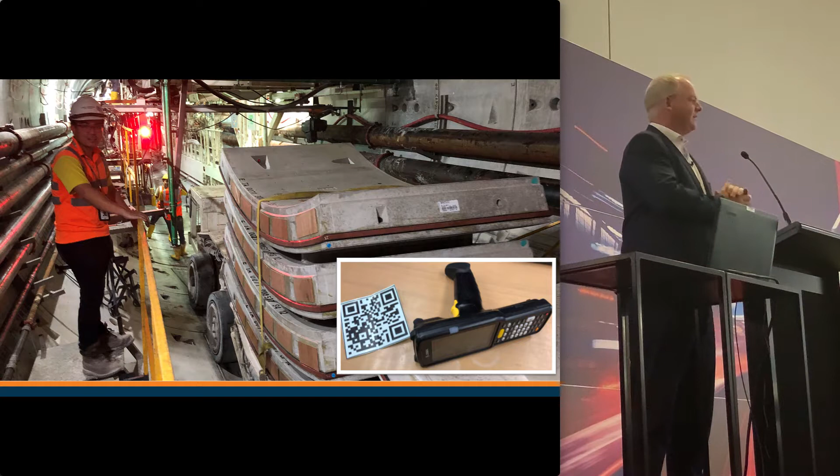I'm going to tell you a quick story about some of the people that are working for Gamuda. This is John Lim, and if you're here this morning for Dr. Oi's presentation, you may have seen John's picture. John is the engineer that wrote the software for our automated TBMs.

I met John about a year ago, and my reason for meeting John was I was asked to go and look at a project where they were using QR codes to track the delivery of the tunnel segment linings into the tunnels. My background is in information management, 3D modeling, project management. So I was helping John out to try and figure this out. And he told me about this automated tunneling machine.

And it was like a secret. Nobody knew about it. So I said, mate, you got to get out and tell people what we're doing. So they put together a case study and put it to the International Tunneling Association. And last week, John and his colleagues won an international award for creating the first self-driving tunneling machine. So a very cool piece of technology and very, very productive.

So my presentation this morning is about technology, but it's actually about the people behind the technology, or more importantly, the people in front of the technology. We believe that we have to empower the staff to innovate, and we believe that celebrating their success on these kind of events is a very good way of motivating people to come up with bright ideas and share them in the organization. So I'm going to use a case study from Kuala Lumpur in Malaysia this morning.

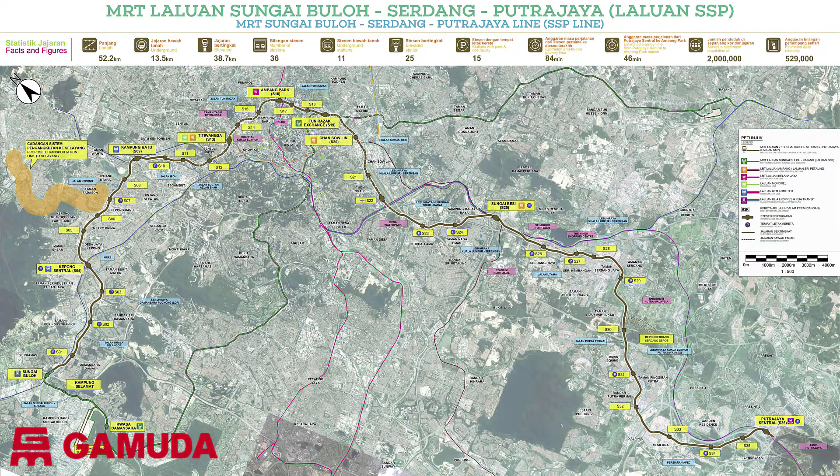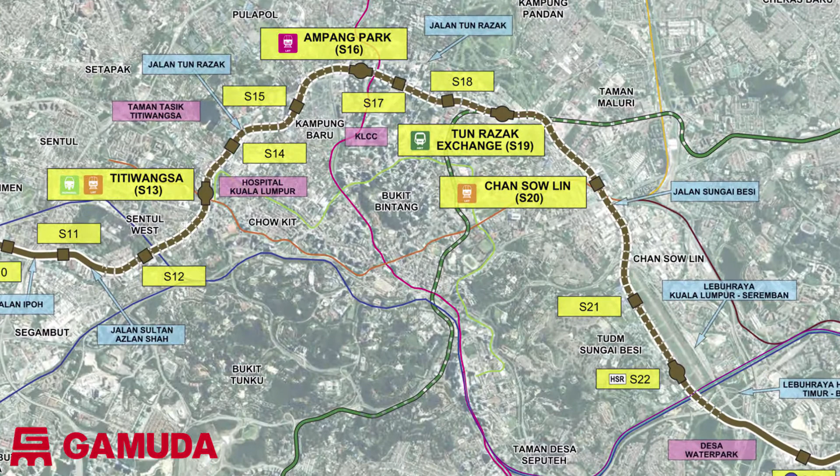This is the MRT project. There are two projects. There's Line 1, which we've already completed and is operational. This is one of the Line 1 trains. And I'm going to talk about Line 2. Line 2 is a 52-kilometer alignment with 13 kilometers underground through the inner city of Kuala Lumpur. There are 17 construction sites on the alignment, involving 11 stations and 6 ancillary structures. These are all major civil engineering projects in and of themselves. And when you combine them into a 13-kilometer design and build contract, it's one of the biggest civil engineering projects in Asia.

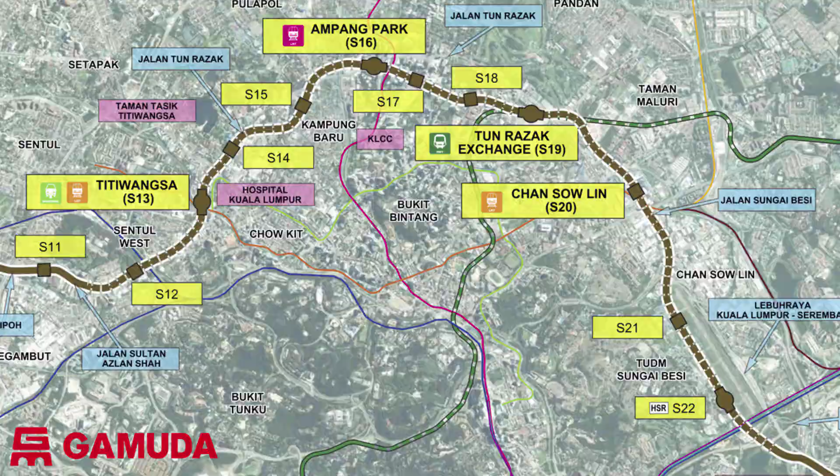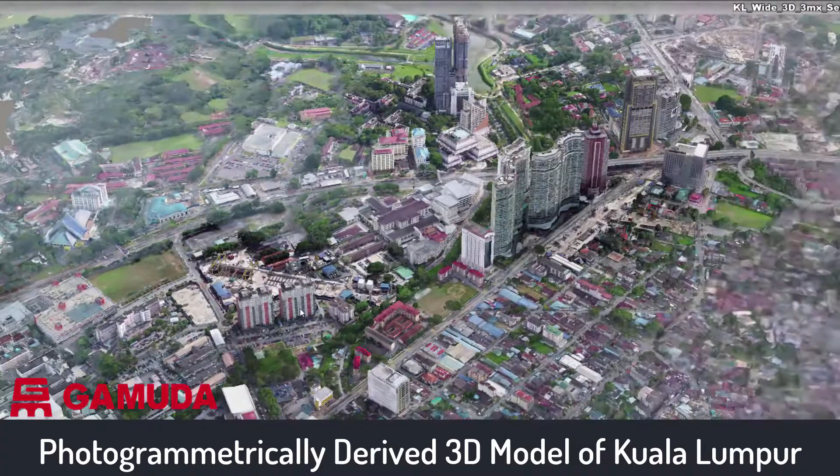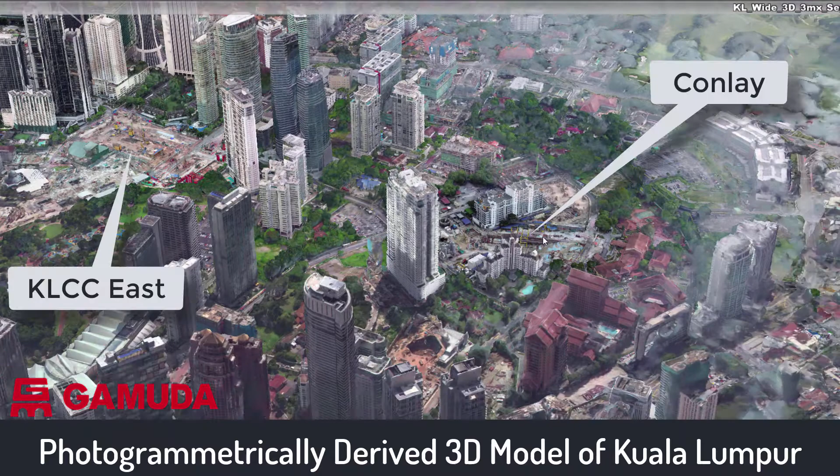We have been extensively using photogrammetry, which is using drones and helicopters to create 3D models of the sites. So this is an actual 3D model of the inner city of Kuala Lumpur, showing the locations of the stations. And you can see, this is the famous Petronas Towers. You can see the sites are in a very dense urban environment. So one of the problems with this project is logistics. I'll come back and talk about some of these particular stations in a minute, but this gives you a very good sense of the scale and complexity of the project.

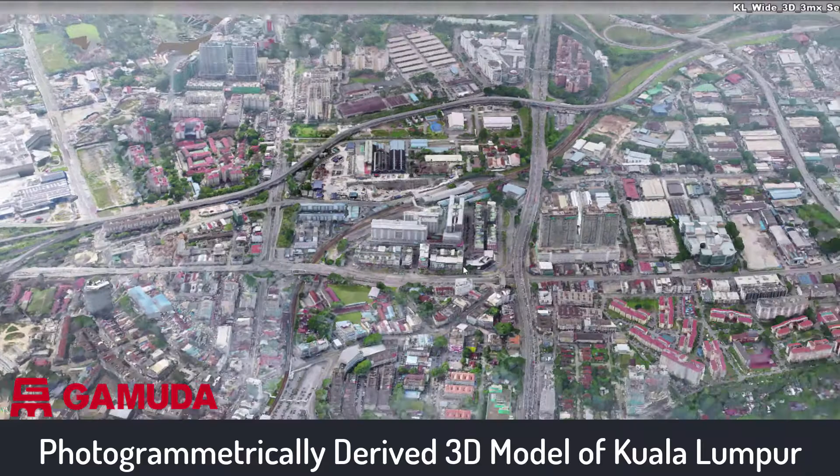Now, this being a construction conference, I'm going to be speaking about the use of technology on the sites and how we've gone from the BIM design side to the actual construction delivery side. To give you a sense of our progress, we started this project in 2015. I've been personally involved since then. And we're currently through construction works at about 62%. And, excuse the pun, we're on track to be up and running and operational by 2022, sometime between Q1 and Q2 2022. So we've still got another 2 years of solid work ahead of us.

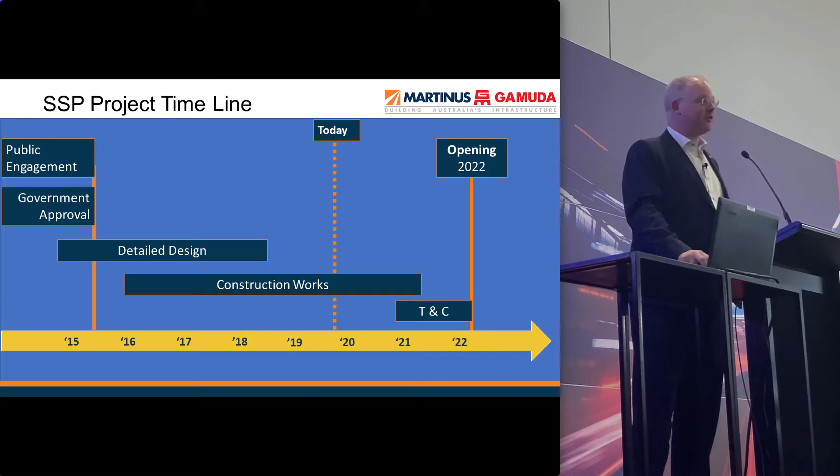Now, one of the strengths of this particular project is the client's involvement. At the very outset, the client set out to achieve BIM level 2, and they were using the UK Crossrail as a template and as an example of leadership. So we set out to basically replicate what was achieved on Crossrail, and we tried to do that without the downsides of Crossrail with the delays and everything else. So we're trying to do a better job than Crossrail, which is no mean feat. So the objective of the client was to achieve BIM level 2.

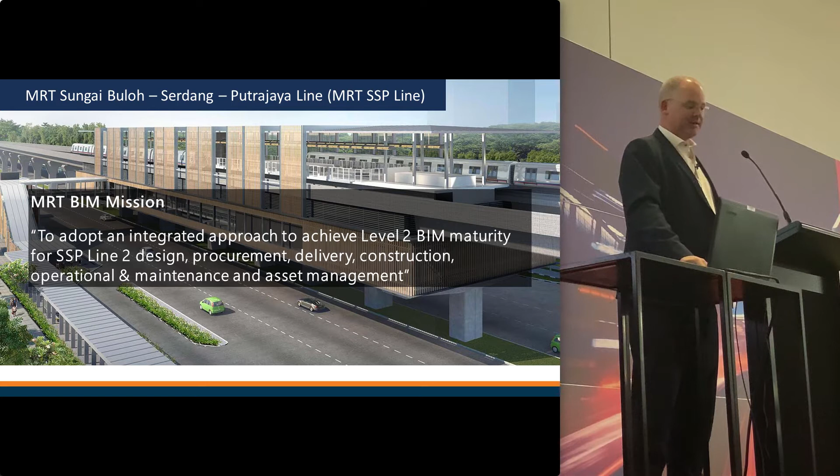So we appointed AECOM as the lead consultant, and they appointed the design team, and they were all contractually obliged to work in BIM. So this is one station that was designed in Revit. This station is called Titiwangsa, and it's an interchange station between an underground rail, monorail, and an elevated LRT. This is the architectural model. This was designed and created by the architects. You will note that it's only the architectural elements.

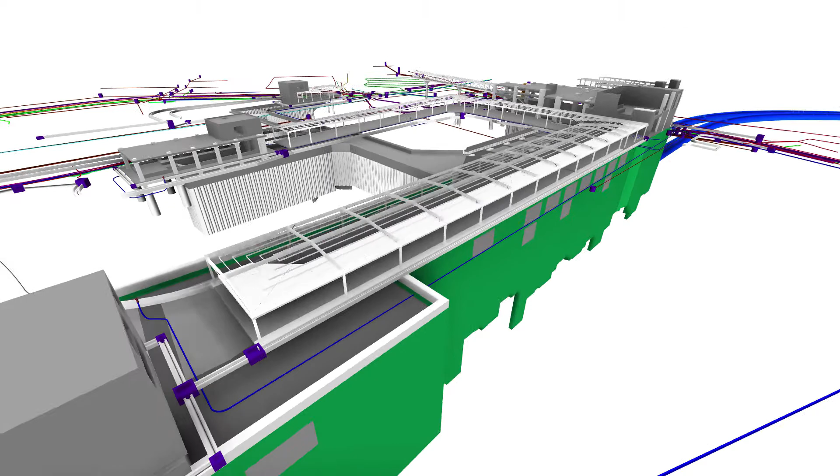All of the structural elements were modeled and designed in detail by the structural engineers, separately from the architects. So there's steel, there's diaphragm walls, there's secant bored piles, and an entire concrete structure inside. And these stations, being underground stations, are heavily serviced, and you can see the complexity of the building services and MEP services in this.

This is the MEP system, so this is the actual air conditioning, electrical, and fire. We've also got all the rail systems. So we have the track systems, we have the comm systems, we have the security systems, and these are all modeled by the system-wide contractors.

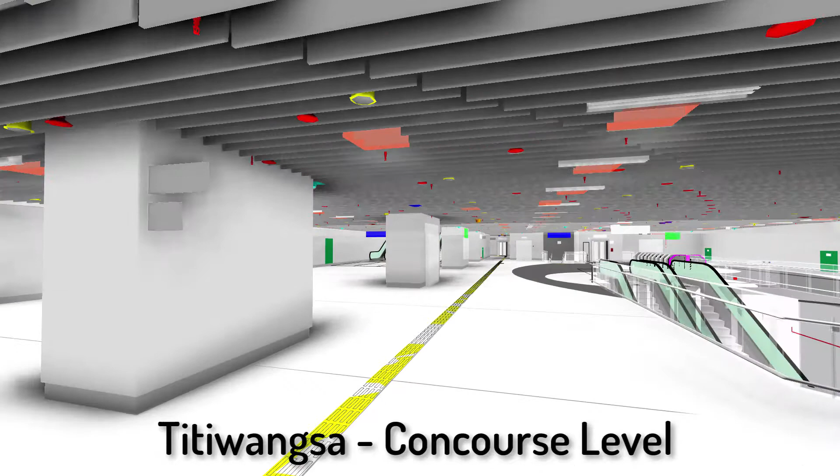So one of the challenges with this process is, how do you put all these models together? How do you find coordination issues? How do you solve design problems? So we have an entire federated model approach, and this is just what it looks like at the detailed design stage. So this is pre-construction. This is the level of detail the designers achieved in the lead up to the project.

With these tools, we can cut sections, we can look at plant rooms, we can look at specific details, and the models give us a very, very clear insight into what we have to build as a contractor. So in terms of the use case, the project is divided into 4 or 5 key phases. We're currently doing the final CSDs, which is the site-based coordination. And you can see our uses of the model.

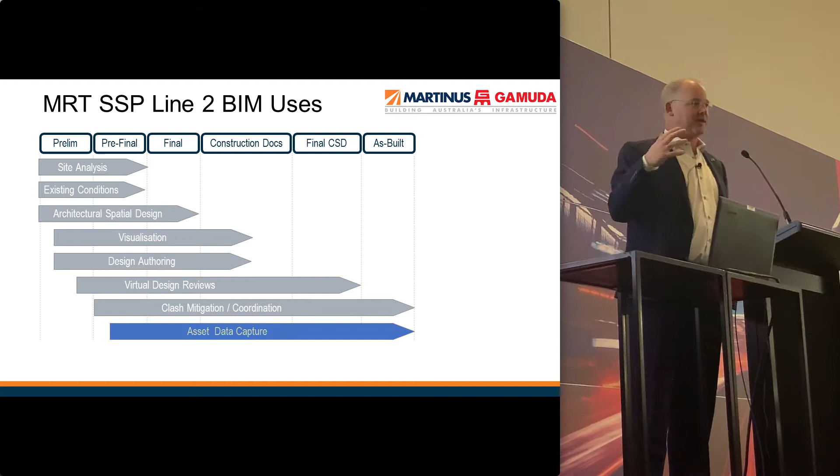So we used it at the beginning for doing design, architectural design, spatial design. We then used it for all the design authoring. So all of the construction drawings have been produced from the models. This is not a 2D back to 3D process. It's a 3D driven process. We say model first, draw second.

And then we've done all of the design reviews, all the coordination reviews, all the interface management, all the interface reviews using these models. And when I say interface reviews, I'll get to the complexity in a second. But the objective of the MRT underwriting all of this was to capture all the asset required to maintain and manage the actual infrastructure when it's built. So I'll tell you how we've done that as we go forward.

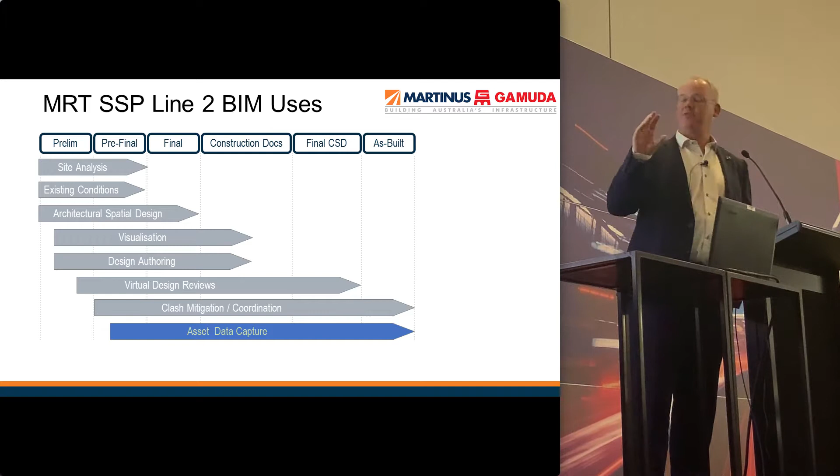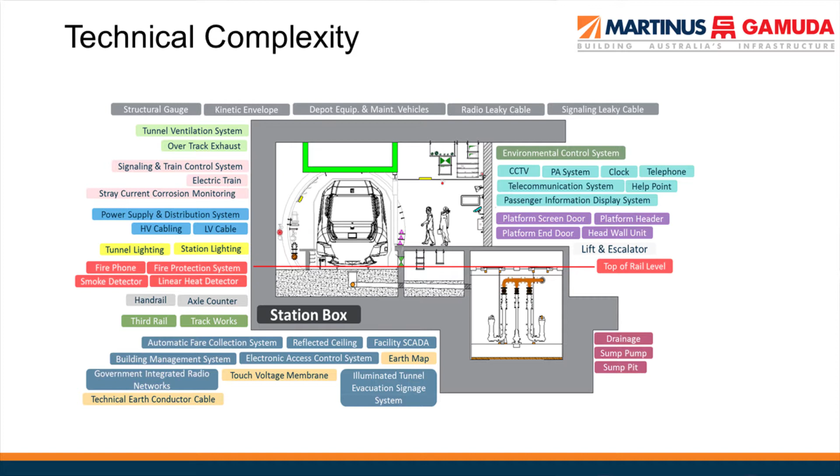Somebody's moving a lift. So this is an overview of all of the interfaces that we have to manage. And as a design and build contractor, it's on our shoulders to coordinate all of these interfaces. So you can see in an underground environment, the sheer number of interfaces and the complexity of interfaces is mind-boggling. So we use the models and the model breakdown to identify all the different interfaces and identify all the coordination issues that had to be done.

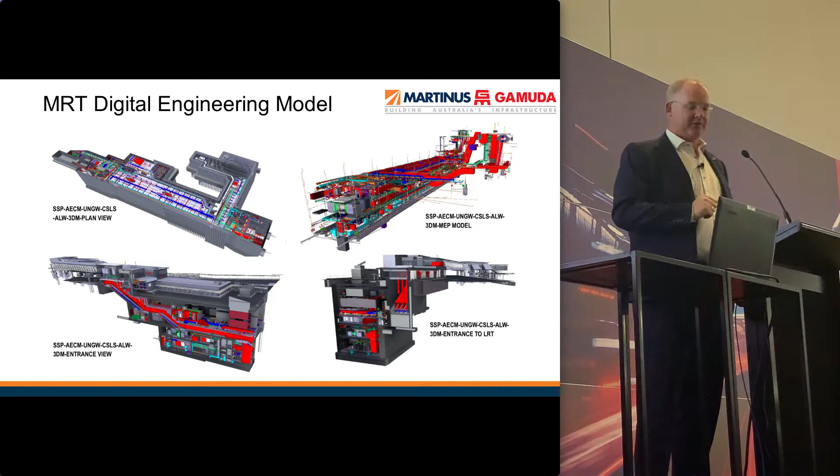So this is an example. This is one of the stations. This is Chan Sow Lin. So you can see we have all the models created and all the coordination done. We've also done it for all the intermediary structures. So we got escape shafts, we got vent shafts, etc. So this is what the consultants produced, and our challenge as the contractor was how do we use this to actually build the infrastructure?

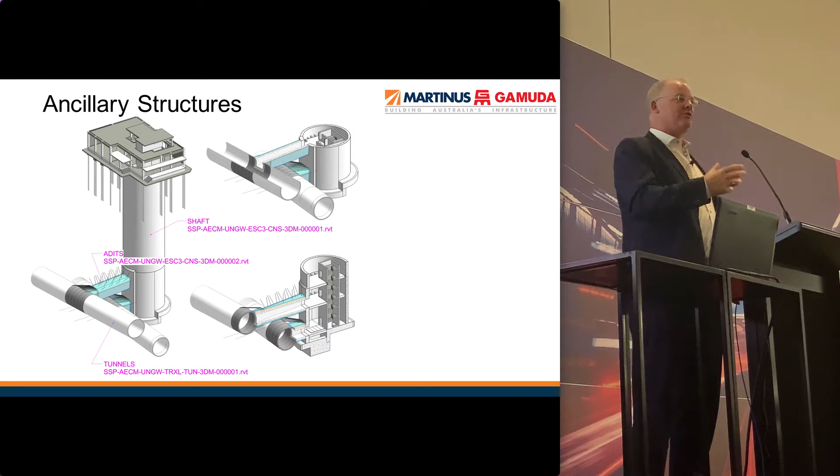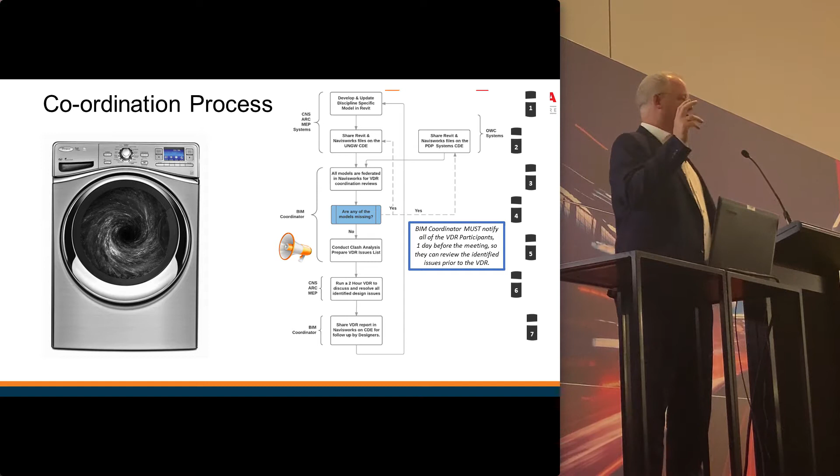How many people here have been involved in a BIM project of sorts? Who's here seen a Revit model or a BIM process? We've got a few people, right? You all know, having looked at those models, how much effort goes into finding issues and solving issues.

And we had a process on the project where we would start through this workflow, creating models, identifying issues, running workshops, tracking all the issues, issuing reports, and then recycling this on a 2-weekly basis. It's like a washing machine. The design consultants go through this every 2 weeks. Sometimes they fix the issue, sometimes they create more issues, but this goes round and round. And it's very difficult to manage and track.

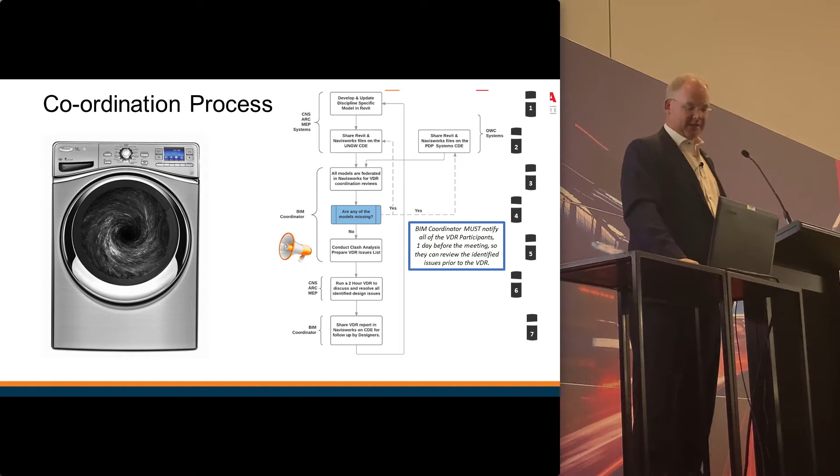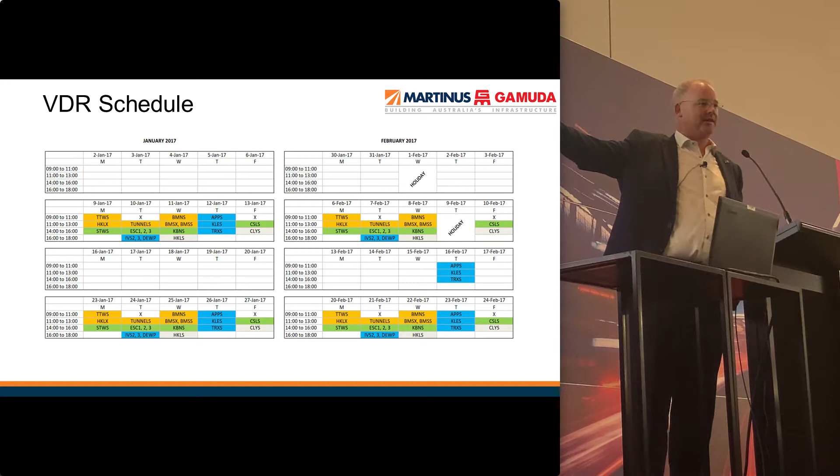So Rahimi and his team set about creating a system where they first of all scheduled all these workshops in a rigorous pattern, so they were all calendared out. So every 2 weeks, everybody knew where they had to be. And each one of those boxes is a station site. So every 2 weeks, if you were on a specific station, you knew where you had to be.

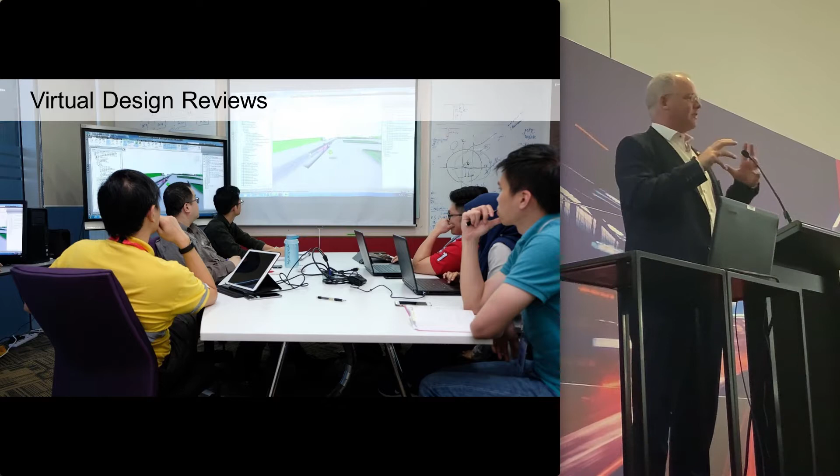The workshops were done in small teams. So we didn't have 50 people in a meeting room. We had the small team of decision makers. These are the engineers. The gentleman on the left with the yellow is the client. This is the coordination engineer here, and these are the design engineers working on the models. So we had very specific groups of people looking at very specific issues. And at the beginning, we would find things like cable trays running through escalator pits.

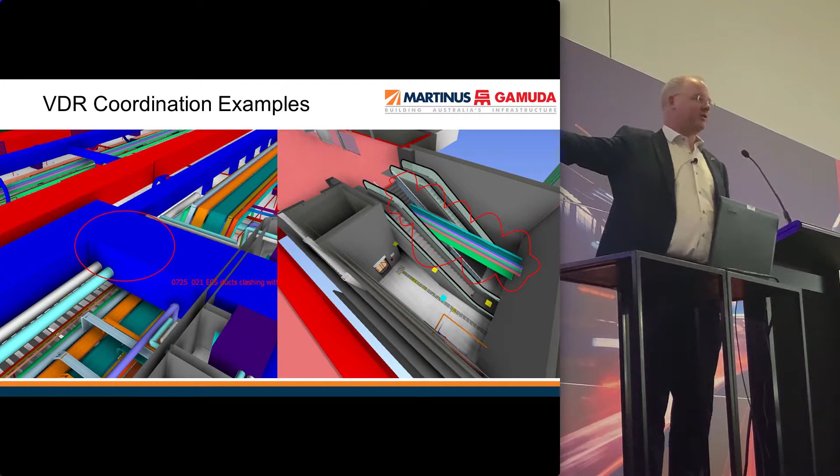Now, good luck trying to get out of that station if there was a fire with all those cable trays over your heads, right? So that had to get fixed. We got right down to solving pipes clashing with ductwork to make sure that we had no MEP coordination issues.

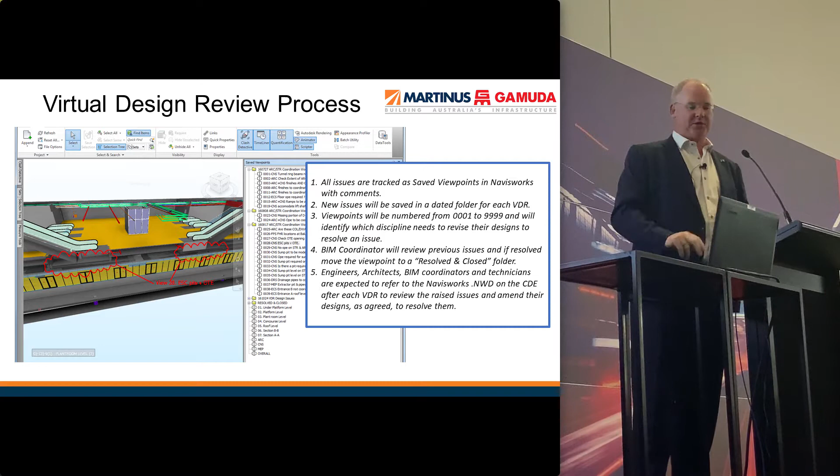So all of these issues were tracked. They were numbered. They were assigned to someone to solve. They were given a date by which they had to be solved. It was all project managed. And this was all done by Rahimi and his team using a platform called BIM Collab. So this is an online system where we can see station by station, consultant by consultant what's happening,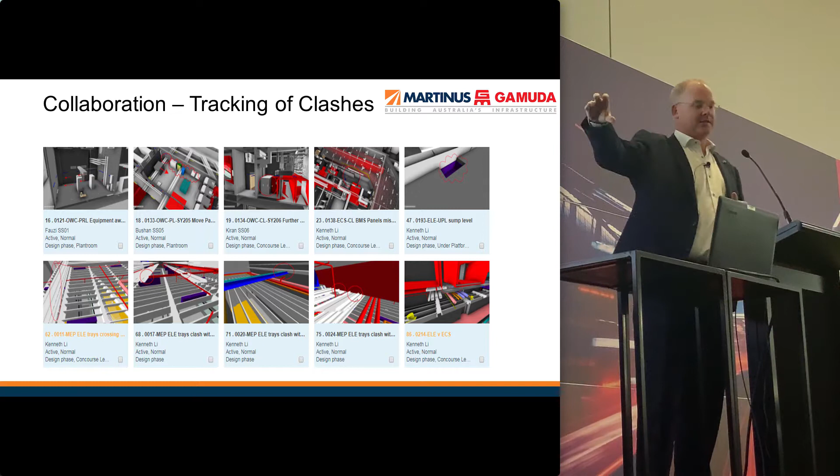and we can monitor their performance. So we would get a dashboard, we could see all the issues, we could see who was assigned to those issues. And the most interesting part of this, because we had 10 stations, we could track different stations against each other. So Rahimi created this tracking chart, and these are the number of issues per station, and you can see how they're comparing. So we could see which stations were doing better than other stations.

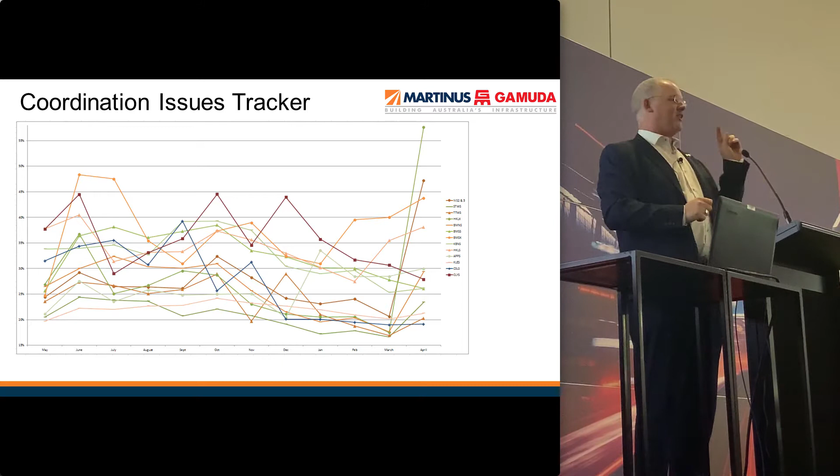Very useful when you've got competitive teams, when you want Team A to do better than Team B, and going, mate, you're doing worse than they are, you've got to up your game. So this all came from Rahimi.

Now, one of the things that we had to do very carefully was manage exchange of information, exchange of models, exchange of drawings. And to do that, we relied heavily on ProjectWise. So we had staff working in Kuala Lumpur, Singapore, Taiwan, Hong Kong, Philippines, and we had 2 offices in India. So we had an office in Delhi and we had an office in Calcutta. All of those offices needed real-time access to the models on a daily basis. So we used this platform to exchange all the information.

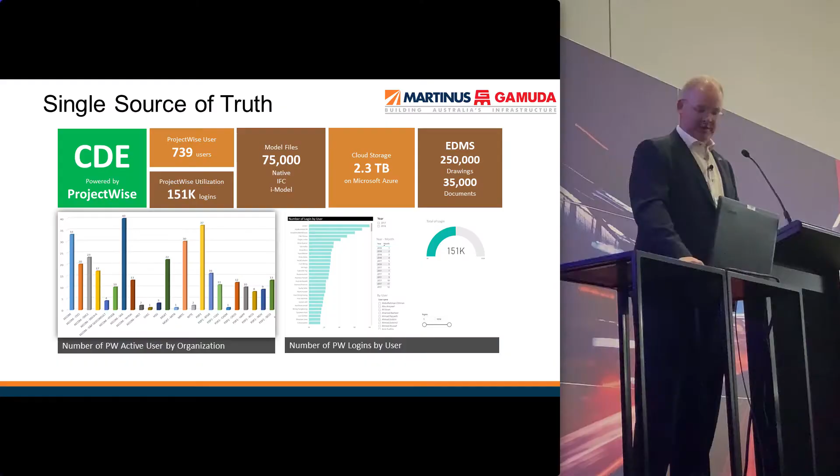Now, I've told you it's a very large project, but to give you a sense of the scale in terms of data, get this. This is the actual data dashboard from the system. This is probably from a year ago. There's over 2.3 terabytes of information on the platform. There's something like 75,000 model files, right? So when you get to that scale, the structure of the information, the organization of the information is absolutely crucial.

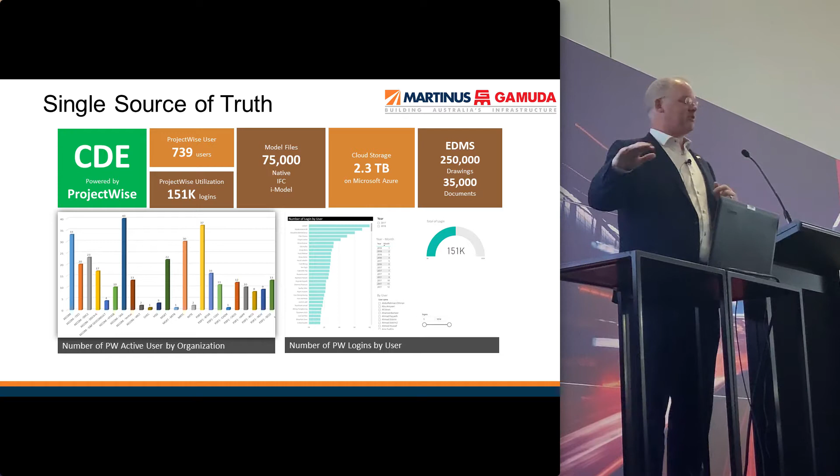And we've created a very sophisticated way of managing it by location, by discipline, by system, by models, by drawings. So it's very, very rigorous. It's very important that you don't let everybody come up with their own system. So on the scale of this job, we as the construction lead managed all of the information management systems. And we basically said what you could do. So we use the platform to share the models, the visualizations, the drawings, the specifications, the takeoffs, all the information that we needed to coordinate and deliver the project is on this platform.

So MMC Gamuda are the first Level 2 BIM capable contractor in Asia based on our work on this particular project. So through our experience, through our knowledge, through our systems, we've been recognized by the BRE as one of the best contractors in the region for doing this. This all goes back to how Nick and the team managed the staff to innovate. Rahimi came up with these systems. Rahimi's teams came up with the ideas.

Our next challenge, having gathered all the information, is to capture the information that the owner needs for the operations of the facility. And it is actually a very complicated task. It's made complicated by the fact that the MRT have never done this before. They don't actually have a full understanding of what data they need. So we had to spend quite a long time planning out what information we had to gather and then delivering that information to them in a structured format.

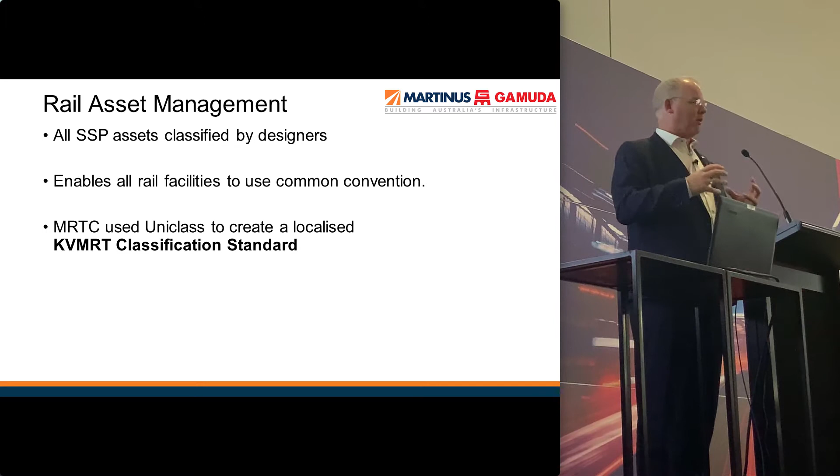So to do that, we've basically adopted Uniclass as a classification standard, and we've basically trained all the consultants to produce models that are properly classified. And it's not straightforward. So you have to classify things in 4 different ways. There has to be a classification by where it is. There has to be a classification of what room it's in. There has to be a classification for what system it's part of. And then there's a classification of the actual product.

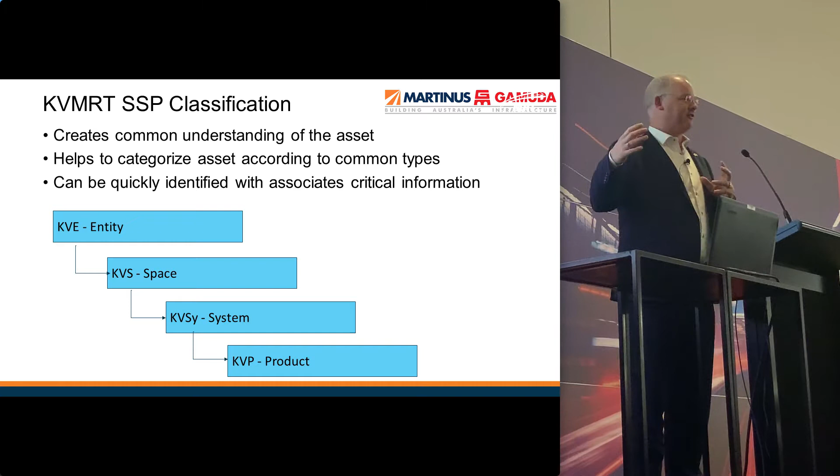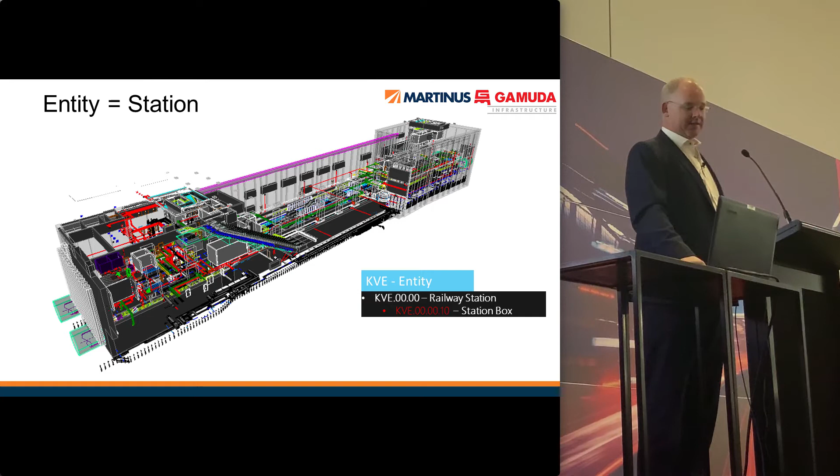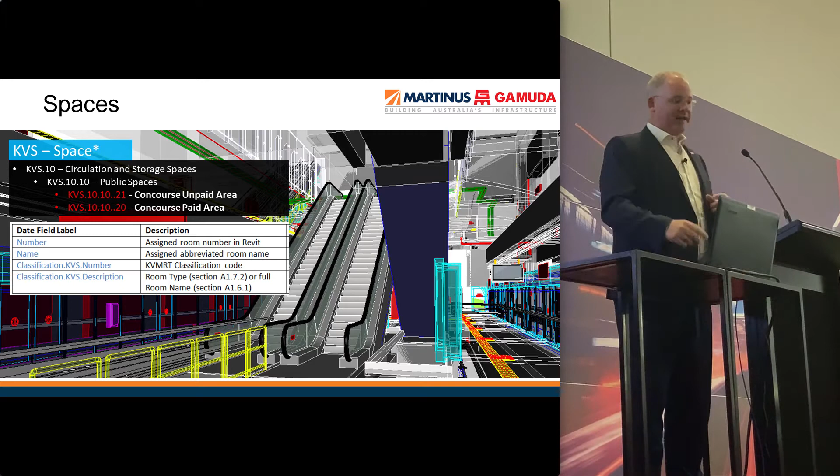If an object's sitting in a different space, we go looking for it in the other space. We then need to know what system it's in. So we need to know whether it's a fire sprinkler system, whether it's a mechanical system, whether it's an electrical system. So everything has to be properly categorized in that system. And then once we get down to the individual components of the project, we then have products. So whether it's an air handling unit, whether it's a cooling tower, whatever it is, there's a code for that as well.

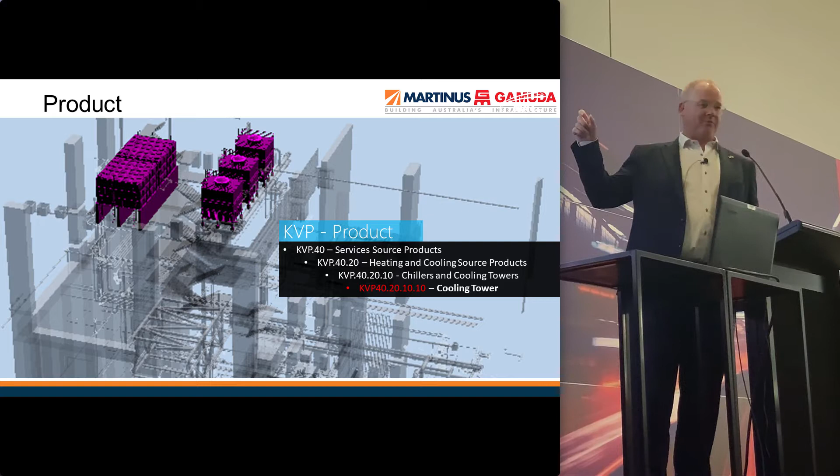The challenge with this is that the design consultants have never had to do this before in Southeast Asia. Getting designers to put in this data and put it in correctly is a pain in the... So this is very, very complicated. So what we've done is we've taken a lead from our friends in the UK. If you talk to the guys on Crossrail, they will give you one key nugget. Put the data on a diet.

Capture the least amount of information possible, and then you can audit it, then you can track it, then you can check it. So what we've done is we've identified the list of things that we're only capturing information for. So everything on that list, we're capturing information for. If it's not on that list, it's not being done. So we're not capturing information around ductwork, cable trays, piping. We're only capturing information about the actual things that we have to replace and manage.

So we've managed to convince the owner that that's enough. No more, no less. And then for each one of those devices or LRUs, this is the information we're going to capture. So we're giving them the classification, the tags, and everything else. So we've come up with a data structure that we know we can capture, that we know we can deliver, and that we know we can audit. So that's the asset management side. And now I want to talk about the site side.

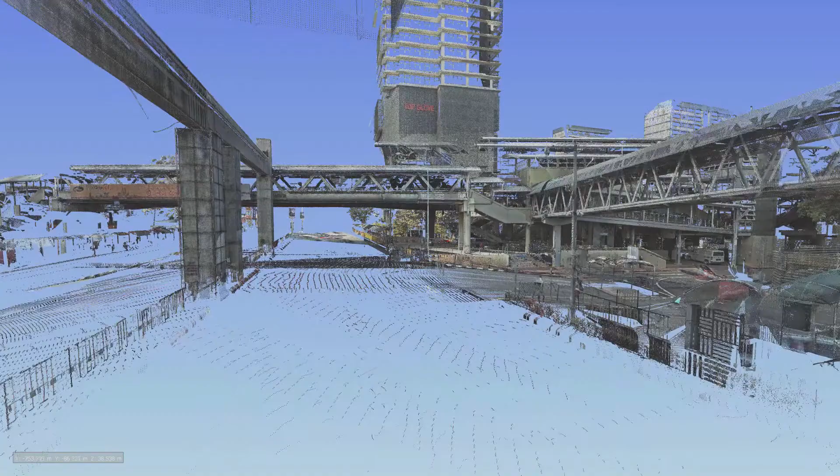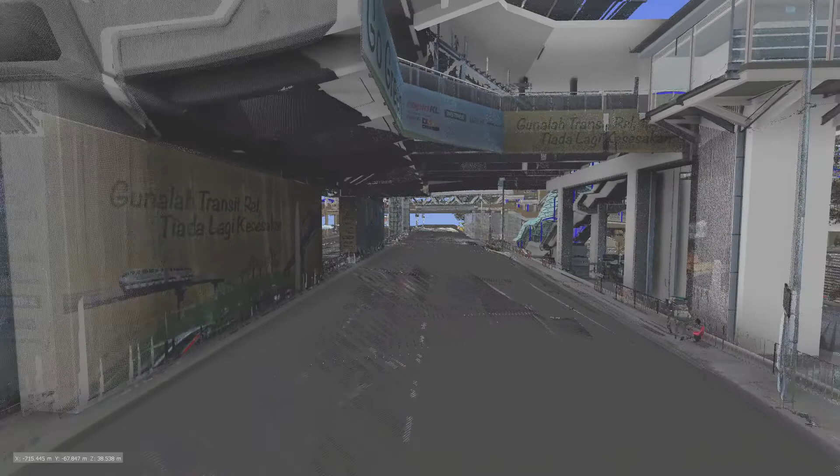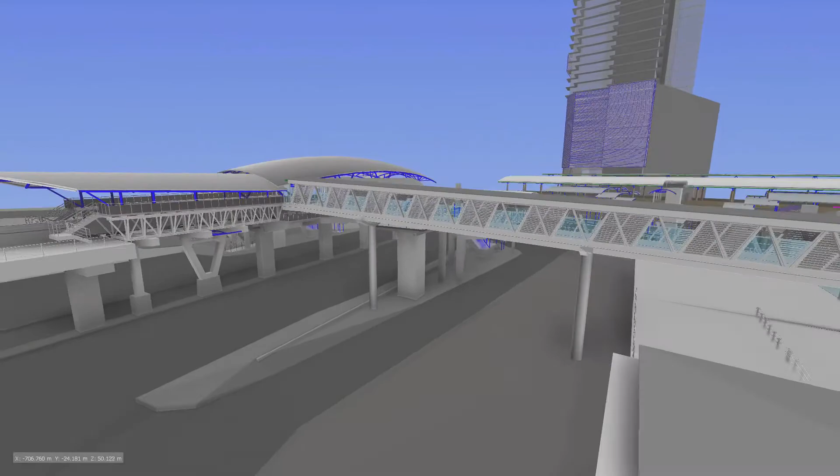And then we use those point clouds to create as-built Revit models, in this case a structural model of the monorail, that we gave to the design consultants and said, this is the as-built model at this station location, now crack on and do the design. Because we know that the as-built records are not good enough. We know the consultants will just take photographs and not look at the detail. So our survey team have created these three-dimensional point clouds and the as-built models of the site.

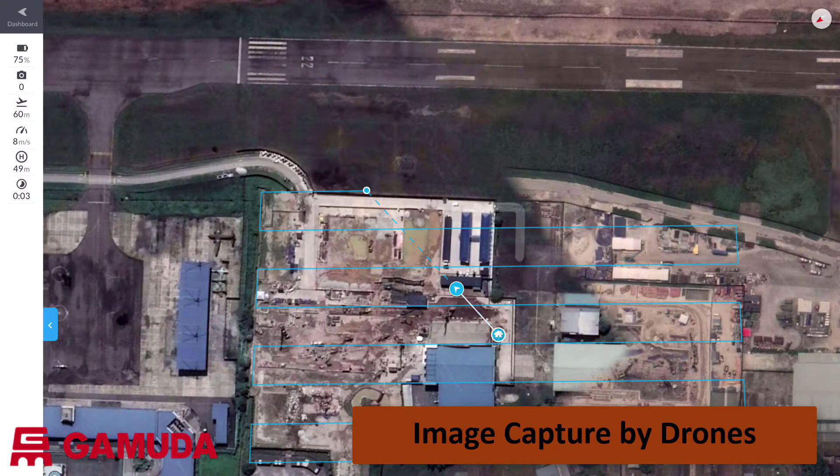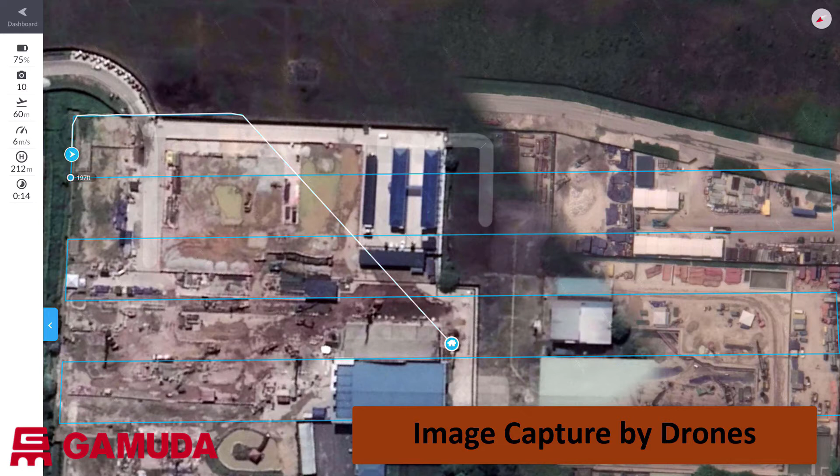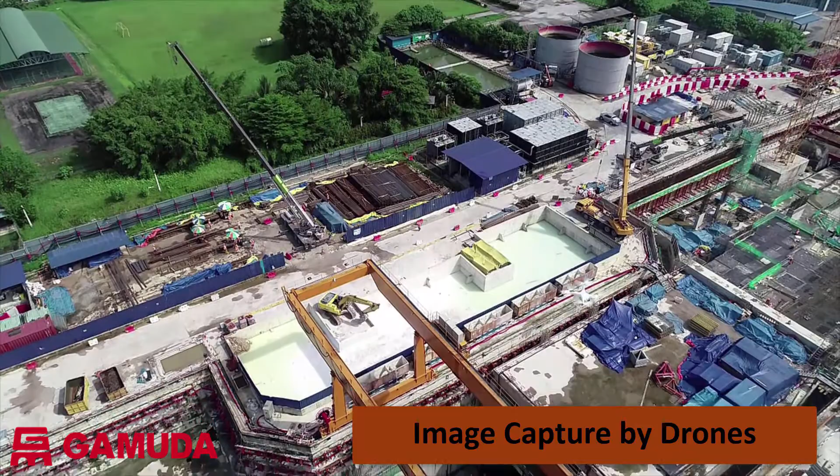And then about 18 months ago, Nick Moorcock, who I just showed you the photograph from, Nick is actually a qualified UAS pilot. He's actually qualified in the UK to fly drones. And we set about doing some research about how could we use drones for surveying of the sites. So this is a drone plan for surveying a particular site. This is a drone videoing another drone doing a survey. So we have two drones doing the work, right? And we've done this for this PR campaign.

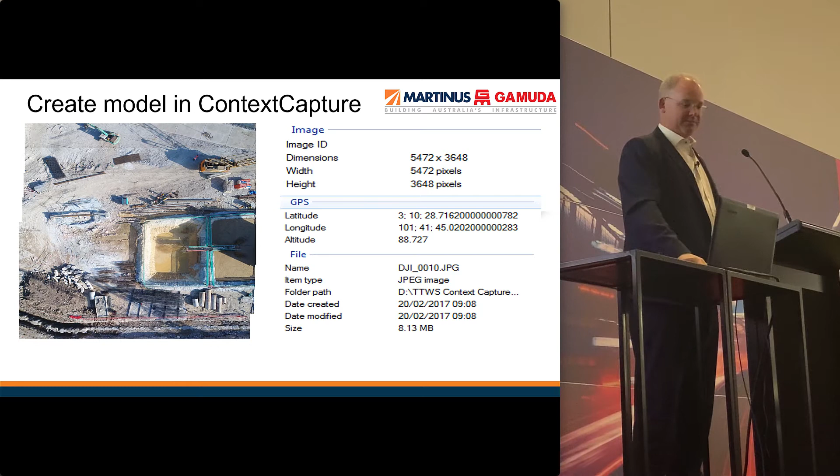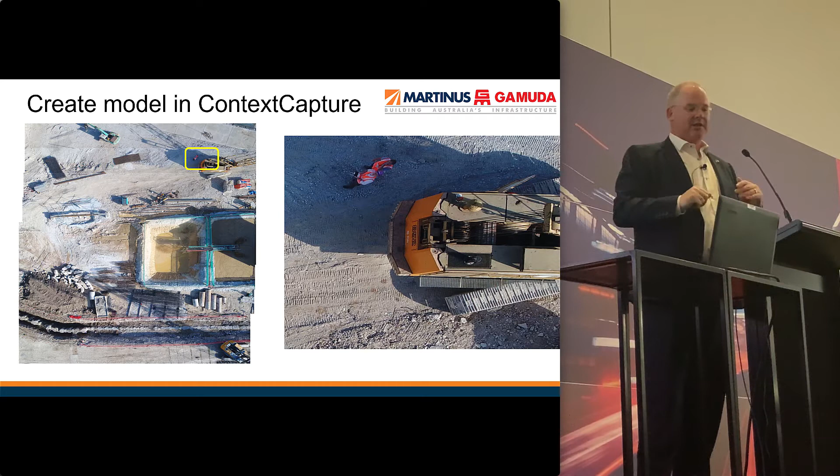So essentially the drones are going along and they're taking photographs. So they take a photograph basically pointing straight down. Each photograph overlaps the previous by 70%. So you're basically getting thousands of photographs per survey. And those photographs are very high resolution. So we're talking about 5.4 by 3.6 megapixels. And if you look into this little yellow box, this is actually myself and Nick doing one of our pilots, so you can get a sense of scale. So this is the scale that we're operating at in terms of photographs. The drones typically operate at about 100 meters.

To make the technology work, we also have to have basically ground control points or reference points. So here we're basically using a target that the photographs pick up, and they're recording the GPS coordinates of that target. And then what that means is when we create the 3D mesh from the photographs, it's in the site coordinates, and we can then use that for site measurement, site surveying, etc.

So the way we operate, we have a very strong safety-first approach. So we operate in restricted areas for the drones. So they're operating in areas where there's no construction activity. They're checking the drone to make sure there's no problems with the actual device before we fly it. We don't want it falling out of the sky into the site, or worse, into the public. And then we've trained.

Currently, we have 30 pilots who have been given special permission to fly on the sites. These guys have been trained, they know the safety and everything else, and they work in pairs. So every time we operate, we have one guy operating the drone, or girl, and we have one spotter. The spotter is on a radio in direct communication with the site manager and the safety officer. So there's a complete control over what's going on with the survey.

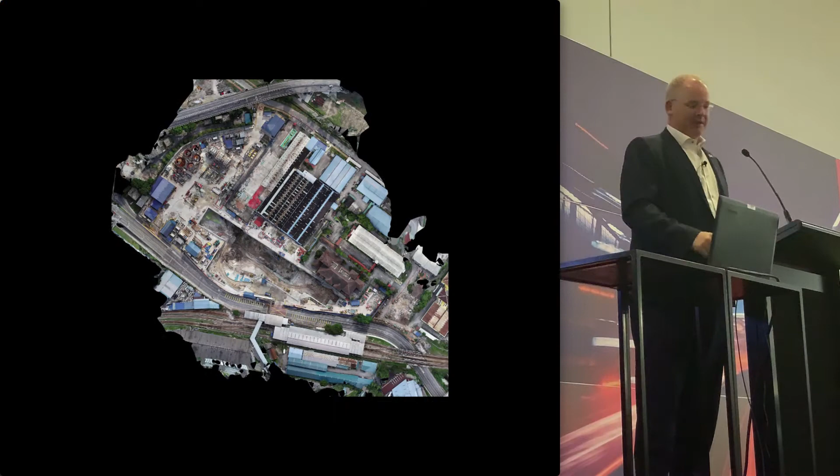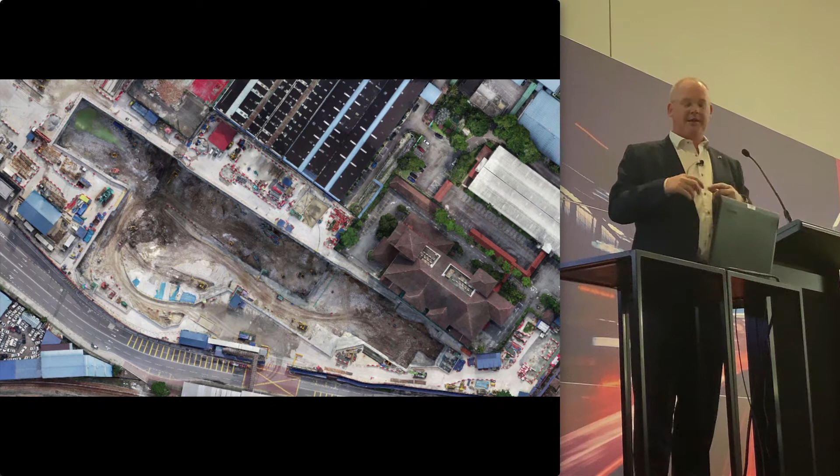What do we use these for? Well, the first thing you can do is you can create proper orthomosaic images. So you can create proper ortho images, and those images can be used for area takeoffs, they can be used for progress reporting, and we've been using them for GIS. And I'll give you an example of the difference.

This is an image from Google. So if you go on Google Earth and you look for a site location, this is what it looks like. If you compare that to an ortho, the ortho is a proper view from above, and then we can plot the TBM path through that. So we can actually see what property lines we're going under. So it's very, very powerful from a desktop surveying perspective.

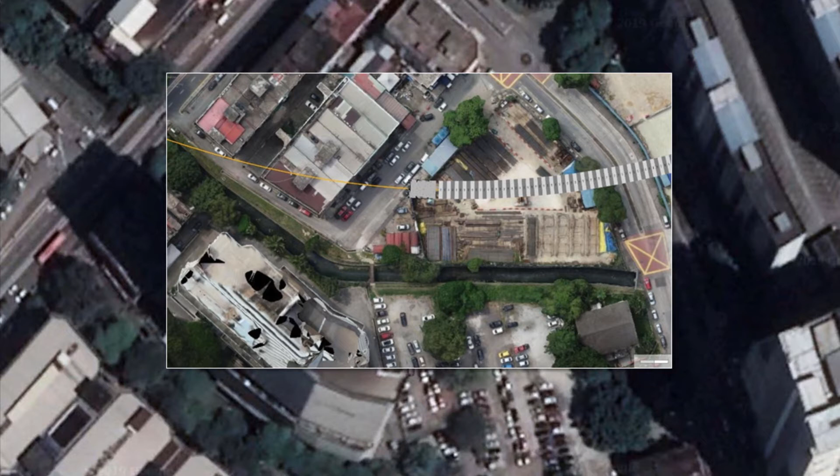We're using it for progress reporting. So this is actually a sequence taken every 2 or 3 weeks of a particular site, and you can see the excavation going through in sequence. So we have surveyed every 2 or 3 weeks, and we have basically a progress model.

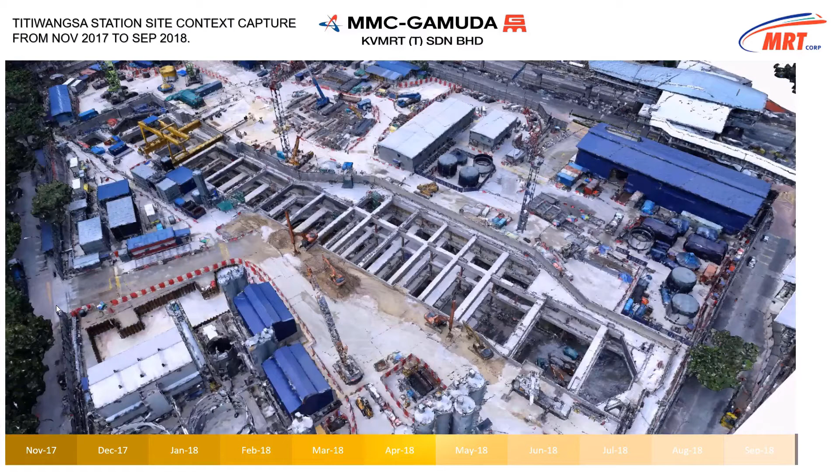Now this is a 3-dimensional model that's dimensionally accurate to the survey grid. So this is not an image. So people see this, oh, this is just photographs. This is a 3-dimensional model. I can measure the depth of the excavation in any one of those instances, or I can measure the area or the volume.

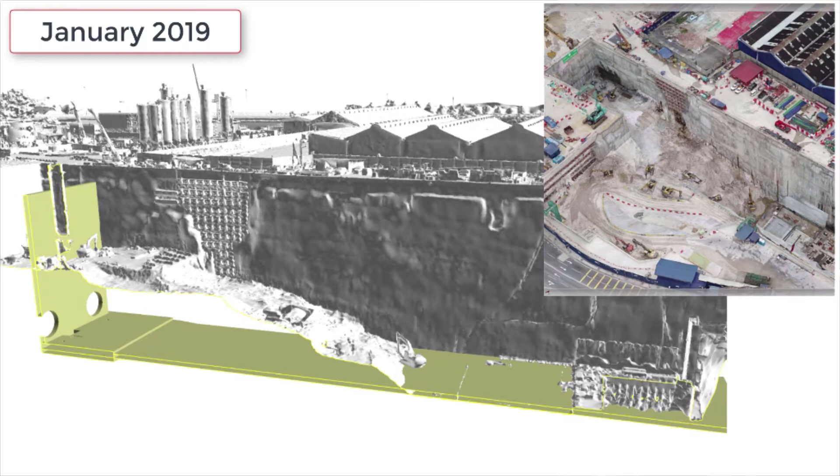And then some of the team that's working with Nick, we figured out how to link the model from the survey to the BIM. So we could actually see that's the basement excavation we have to reach, and we can compare our progress against our target. So we actually have basically a known destination we have to get to, and we can then use the survey to see how close we're getting to it. So this is a very useful way of showing to a client how far we are away from actually completing an excavation.

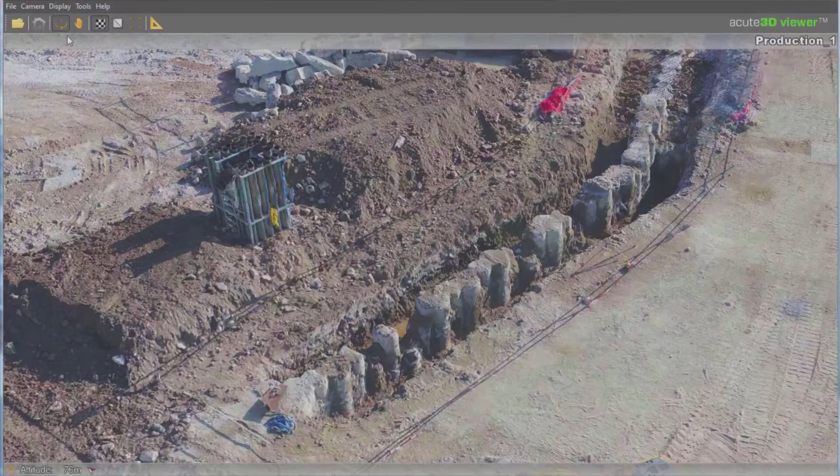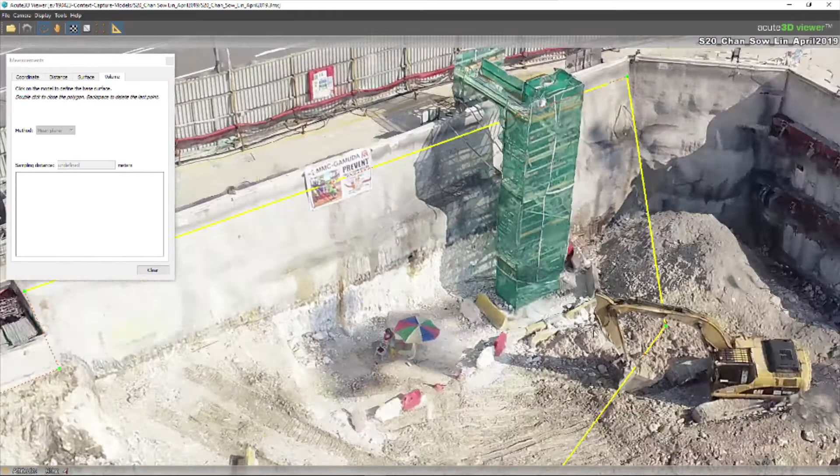And this again is the model in this corner. So anybody who's familiar with these, you'll know that you can use these models for takeoff, so we can actually measure linear dimensions. But more importantly, from the surveyors, we can measure volumes. So in this example, the operator is basically pulling out an area of the site, and they want to work out a cut and fill for creating a level deck. So here you can see them setting the boundary, and then the operator will set the parameters. So we'll use basically a 28.5 meter level that we want to create.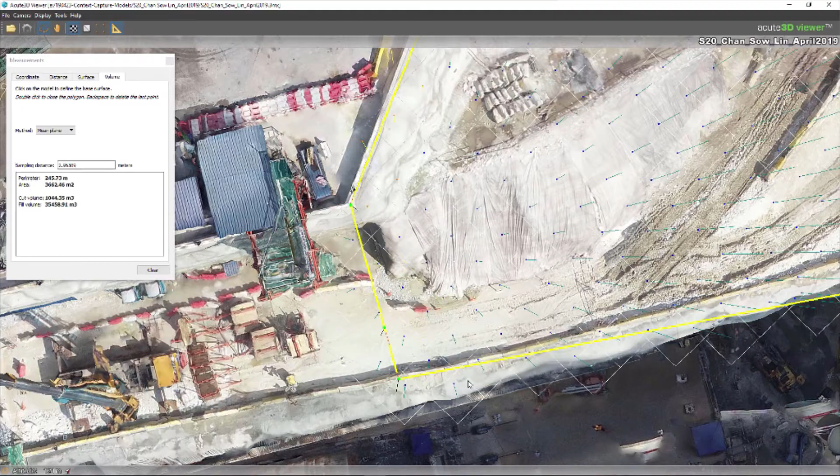We'll set the grid, and then the software will tell us that we need to remove 11,500 cubes and fill 9,500 cubes. That is transformational when it comes to surveying. And it's transformational because the survey takes no more than 2 hours, and the post-processing on the computer takes less than half a day. So you can go out on site, survey an entire site in a couple of hours, and have this level of information available to the engineers by the end of the day.

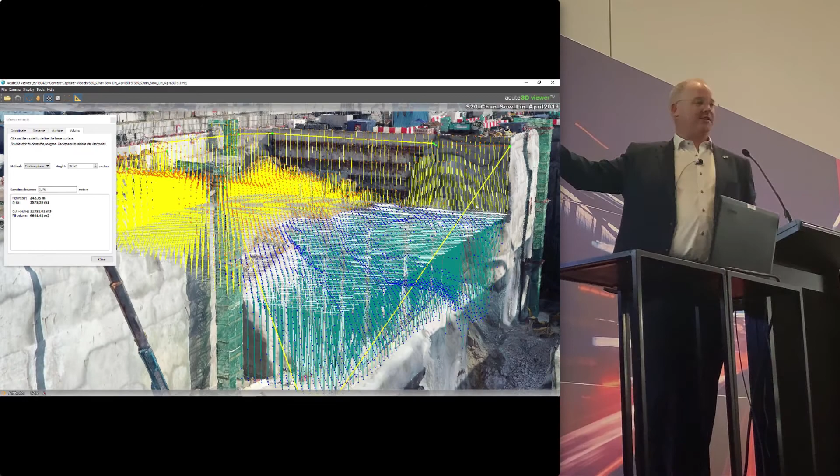And there's no way around it. If the surveyors tried to do that, it would take them a week. And by the time they were finished it, they would have changed the levels and everything else, the calculation would be gone. So this technology is transformative.

Now I want to introduce you to two more characters in this process. Tony Joseph is our GIS manager, and this is Mr. Pois, who's our surveyor. Mr. Pois has been pushing the guys to use the drones for as many ideas they come up with. He's the one that's encouraging the innovation. He's the one enabling the innovation. Tony has transformed the delivery of the information to our engineers, our project managers, and even to our client.

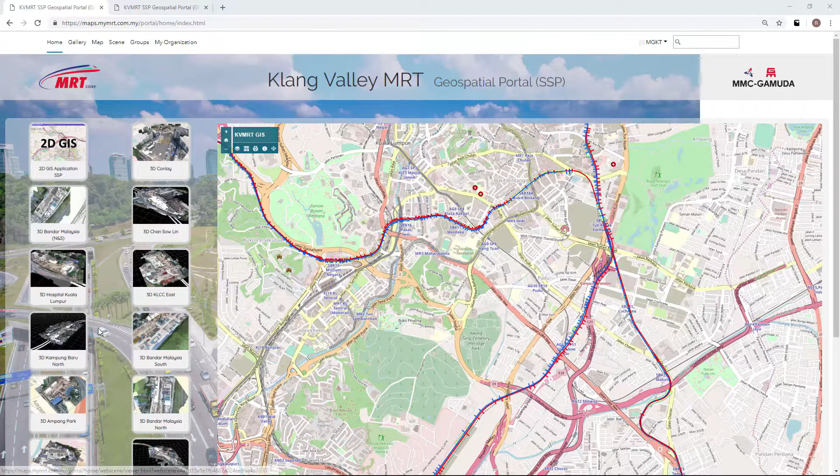Tony is a GIS expert, and for those of you who know GIS, to me it's a two-dimensional mapping platform, but it's much more than that. Tony's been able to take all the models, use GIS as a gateway. This is a web browser, so this is Chrome. You can go onto the web, if you know the URL.

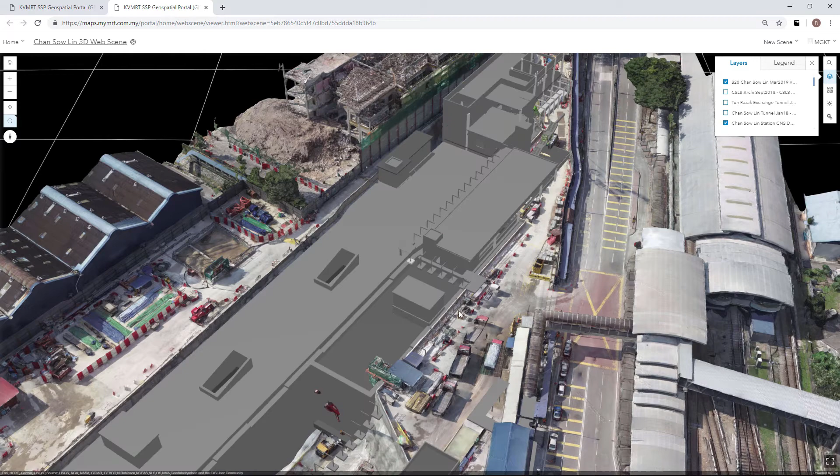You can access the model from the drone survey and the Revit model from the BIM team, and you can overlay them on a browser. You don't need to have Revit, you don't need to have Navisworks. All you need to have is an internet connection and a password. And you can get a three-dimensional model of your site at a key point in time, and you can even go back and look at historical records.

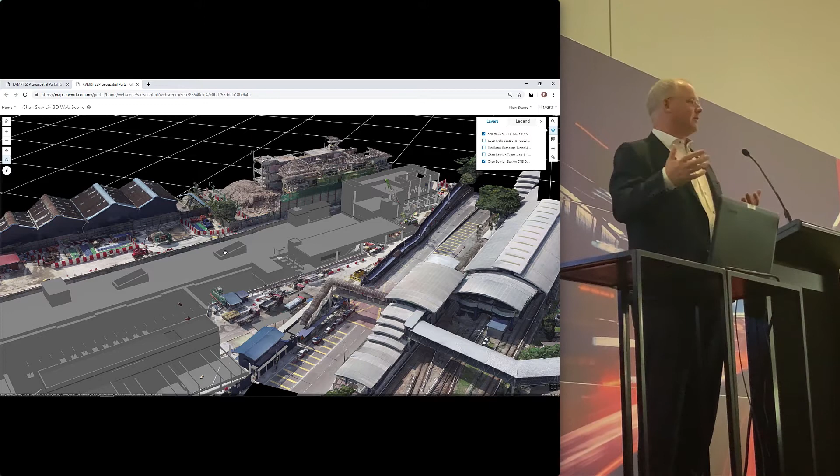So we have project directors who don't have the time to visit 17 construction sites, who will sit down with a team of people and go through these models in an office environment. So Tony has been able to transform the way we deliver the information to senior staff. Okay, and we see that as very, very important.

And one of the other things that Tony has done, which I think is really cool, is Tony has taken the information from the tunneling machines. So we're running 8 tunneling machines. We know in real time where they all are. If you go on the GIS platform, you can actually see all the tracks of the TBMs, and you can tell exactly where they are underground.

And you can see here, this is the orthomosaic image, and you can see the red and blue lines indicating the tunnel drives, and they will actually tell you exactly where the tunneling machines are in the actual underground space, on the platform, on the cloud, in real time.

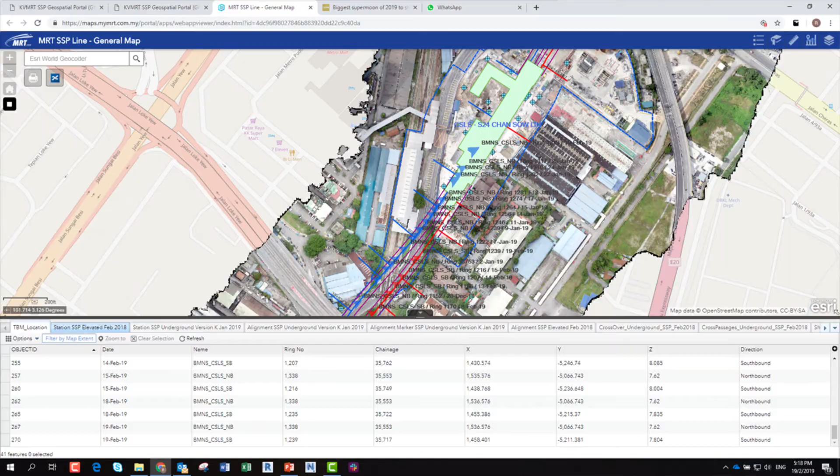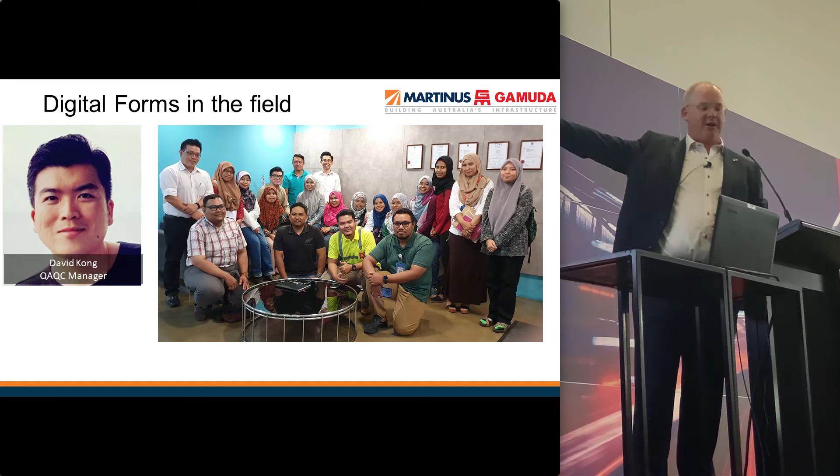Now the last character I want to introduce you is David, and I think David's somewhere here. Where's David? There's David. David has been leading our digital site, our digital forms business, and David is now based here in Sydney, and he's helping us build the Martinus Gamuda business. David has helped train up a huge team of people, hundreds of people, to use what we call our digital forms or paperless construction.

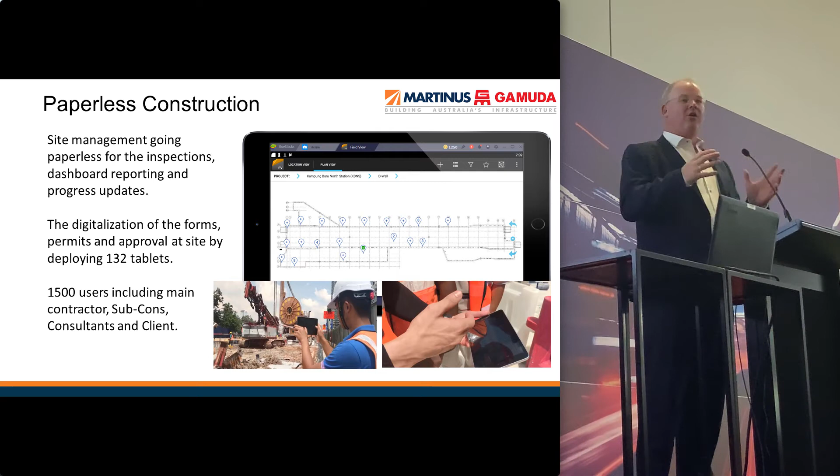And what we mean by this is that we've taken all the traditional paper processes on site, whether it's a progress report, a safety inspection, incident report, a quality inspection, all the stuff that you see engineers walk around with clipboards and bits of paper in their back pockets. We've taken all that and digitized it. So all of our inspections for all the construction sites are now done on iPads or Samsung devices. And all that information is captured in a structured format.

So what we've started doing is speeding up all the processes on site. So if you want to get approval for an activity on site, you don't have to get a piece of paper signed by 2 individuals and go around and look at them. It can all be done digitally. So you can fill in the form, it gets immediately notified to the recipient, they can sort it out and they can send it straight back. So we've sped up by a huge factor the approval process for works on site.

But what's intriguing about this is we set out to digitize the paper process for 2 reasons. 1, to be more efficient, and 2, to capture the information much more systematically. Every time one of these forms is filled in, it's recorded on a cloud system. It can't be erased, it can't be eroded. We never lose the information. We lose paper all the time.

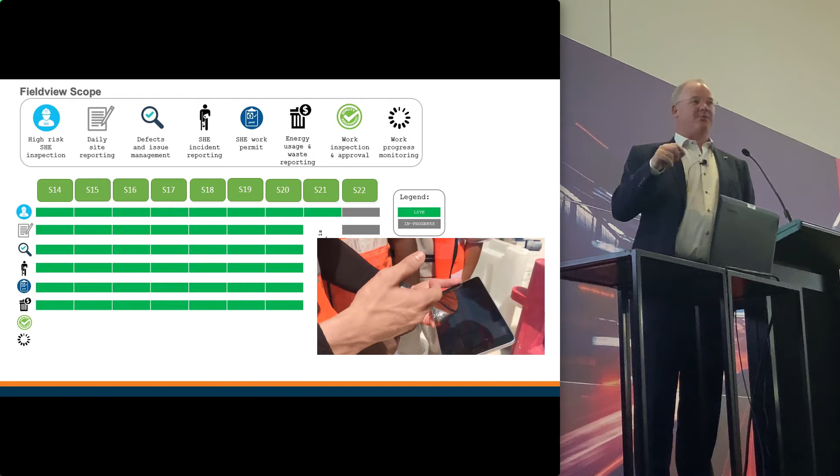But what we discovered is we achieved those 2 goals, productivity and security, but we've also unlocked something completely new, which wasn't foreseen. We're now using these systems to capture information for reporting. What we've realized is we can start running analytics on these reports. So we can start capturing historical information and comparing it one site to another site, 1 week to a previous week, 1 quarter to a previous quarter, and we can start to understand from a data perspective what's happening on our projects.

So we're currently running an innovation project to look at data dashboards. In this case, we're using IBM Cognos, in terms of how do we improve even further with the use of these digital forms, our understanding of what's happening on site. And our goal is to get to real-time progress monitoring using dashboards. Our current reporting is 2 weeks behind the activity. So if you get a report from one of our sites, it's about 2 weeks behind what's actually happening on site. And most people are used to that.

You send a WhatsApp, you get the construction director, puts together a few reports, you get a few Excel tables, a few Word documents, a few opinions, and you get a feeling of what's happening. This gives us real-time information of what's happening on a job site. This is what we're currently working on.

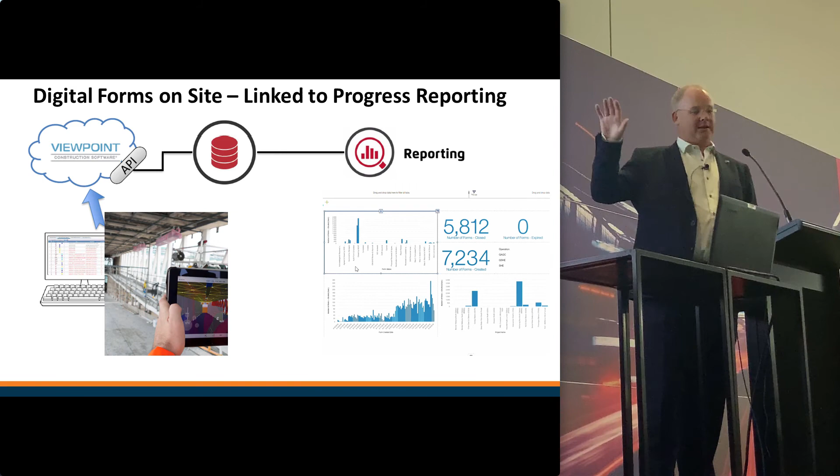So to wrap up, the key message here is that you can have all the technology you like, but if you don't enable the people to use it, you won't get these innovations. And it's my honor to stand here and represent the team of people who have done this over the last 2 to 3 years. They've won awards all over the place. They've won awards from the Tunneling Association, they've won awards from the software vendors, and we've started to get recognition through people like the BRE for our Level 2 BIM certification.